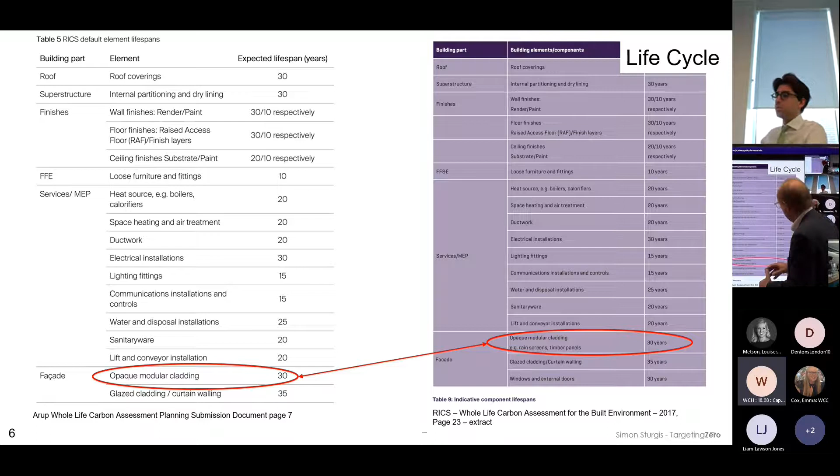Now, if you look on the left here, this is from the Arups Whole Life Carbon Assessment Planning Submission document. This shows a list of all the bits and pieces in the building - structure, services, cladding, and so on. Nothing in that list is more than 35 years life expectancy. Now, what Mr. Pilbrow said is that the issue for him is that the RICS professional statement, shown on the right here, sets out those timeframes, and therefore he's going with them. And that is correct.

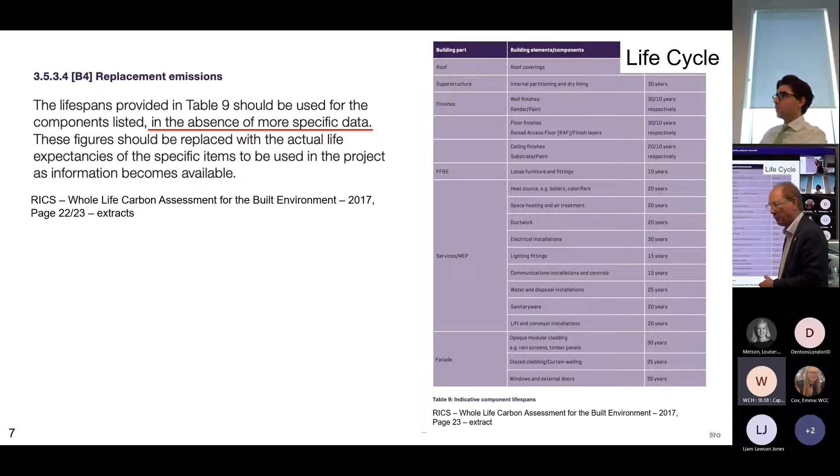But if you look at the RICS professional statement, and Mr. Pilbrow will know this, obviously, because he's been involved with that - it says the lifespans provided in Table 9 should be used for the components listed in the absence of more specific data. These figures should be replaced with the actual life expectancies of the specific items to be used in the project as information becomes available. So in other words, you're not bound by this. If it was thought necessary to challenge the timeframes put by Arups, the Pilbrow team could have done so, but they chose not to. So I can only assume they must have agreed with them.

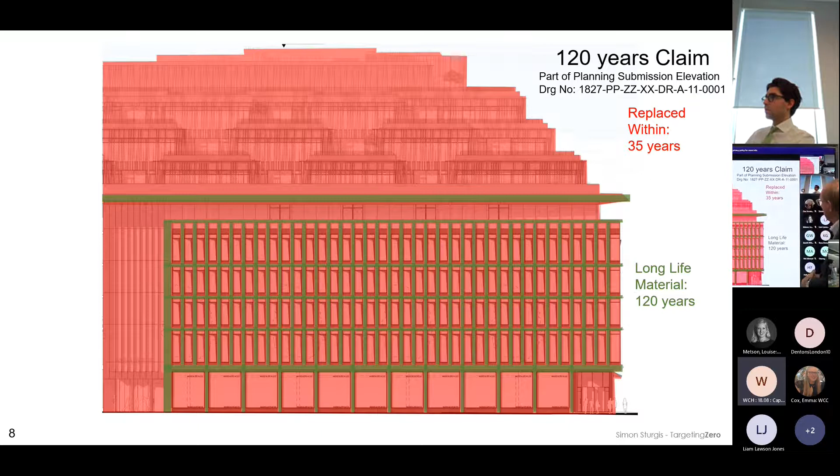So what that means in terms of durability, there's not a great deal of difference between this building and this building, being Neale House, because this building is now 42 years old. And yes, it needs the same sort of level of replacement - it needs plant replacing, it needs certainly the windows probably need to be replaced. This cladding, I'm not quite sure what it's made of, but if it's made of something like bronze, which is possible, then you could replace it, but if you could keep it, I would guess. But certainly the probability is you replace all of that, which is exactly the same thing that happened to this. So what I'm saying is there's an equivalence - say 42 years, which is the age of this building, after this has been completed, you'd be in exactly the same position. So they're very similar propositions.

Now, a lot has been made of this particular diagram, which I want to take you through - the options. And as I said, quoting Mr. Pilbrow, the decision to demolish was taken in 2018. So if we look at these, what I've got here for you on the left is the facade retention section, which I'll come back to in a minute. But what you're looking at here is the 16 options that Mr. Pilbrow's referred to. The first row of these all represent new build options, so those are not really what I'm talking about. Then you look at this row here, and again, all of these include significant new build elements to them. And indeed, if you look at this one here, there's no additional flooring on either floors.

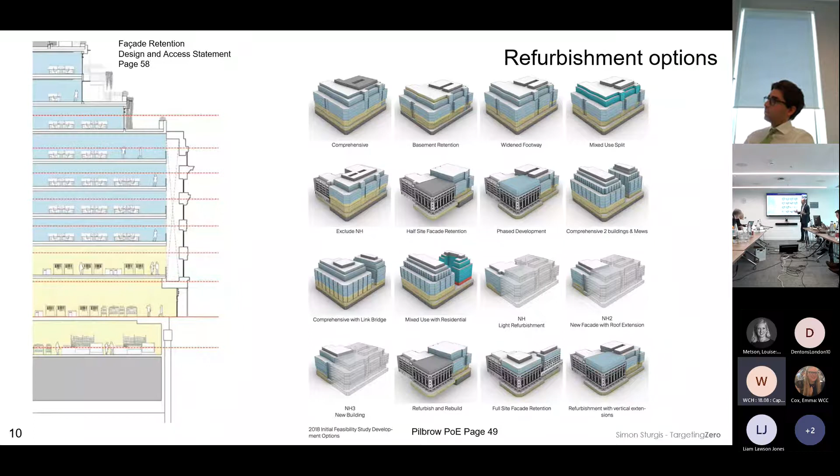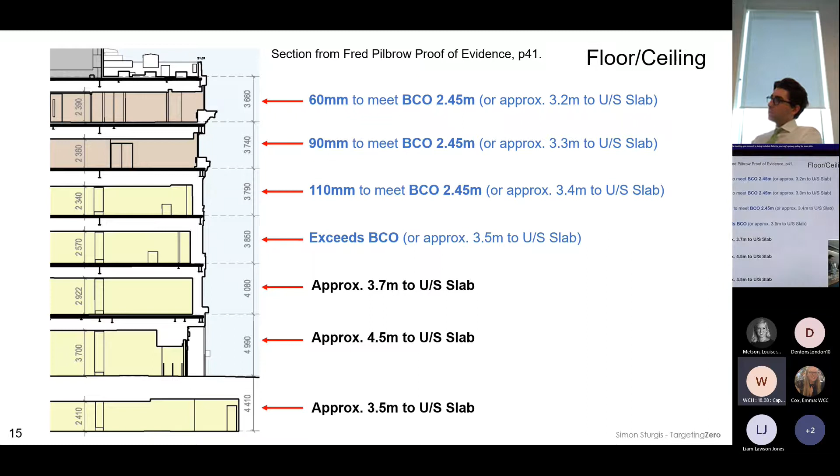There is significantly more height available that is being used, and that's because we've got air conditioning units and presumably ductwork and so on. So walking around, you get a misleading impression because, as has been pointed out, there's all sorts of stuff in there which needs to come out.

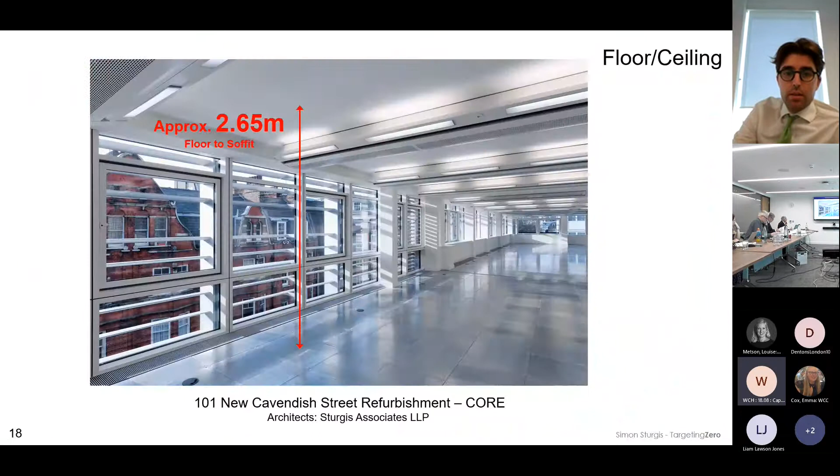As it happens, that previous slide, which was done in 2009 - this building has just been refurbished, and this is the interior.

Now what they've done here, and if you compare this again, you've got 2.65 floor to soffit. They've exposed the columns, and you can see the columns are quite dense, actually dense over there. Also, this building has a fairly limited amount of light. It has deep floor space, and of course there's the low ceiling. You can see here the air conditioning system, the cooling system, has been put in, which would distribute out depending on the layout. And then you've got light fittings hanging down in there.

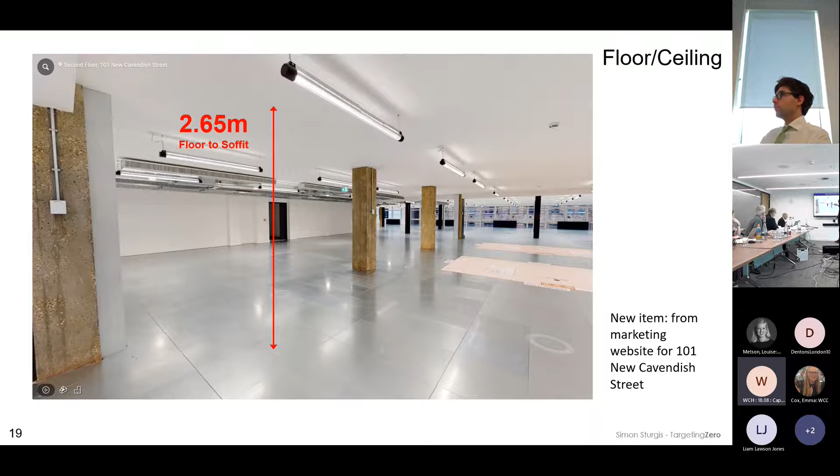So with all this stuff here, you're down to a much lower height. You've got about 2.65, and underneath things like beams and services, you're about 2.2 to 2.3. So that's all quite low compared to Orchard House.

Now what is interesting is that this space is on the market right now for £72.50 Cat A, which is without partitioning and so on, just fitted out with basic services and flooring. But if you want to fit it out, it's £79.50. So that's not a bad rent. And I'm thinking, well, the agent is Knight Frank.

Now this building is in a worse location than being on Oxford Street. It's got lower floor to ceiling heights than Orchard House. And the columns you can see here are quite dense. So in a way, I would suggest this is a less attractive proposition in a number of ways compared to Orchard House. Yet the agent, Knight Frank, who is also the same agent advising Marks and Spencer, says that the buildings refurbished on the Marks and Spencer site are unviable and not capable of refurbishment.

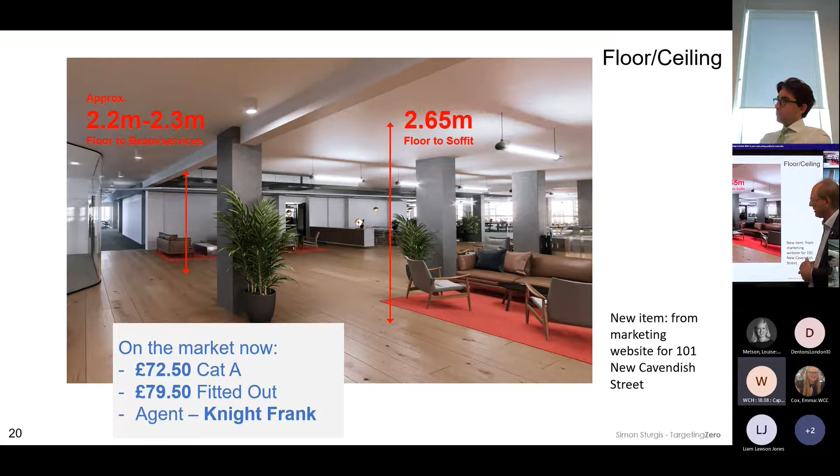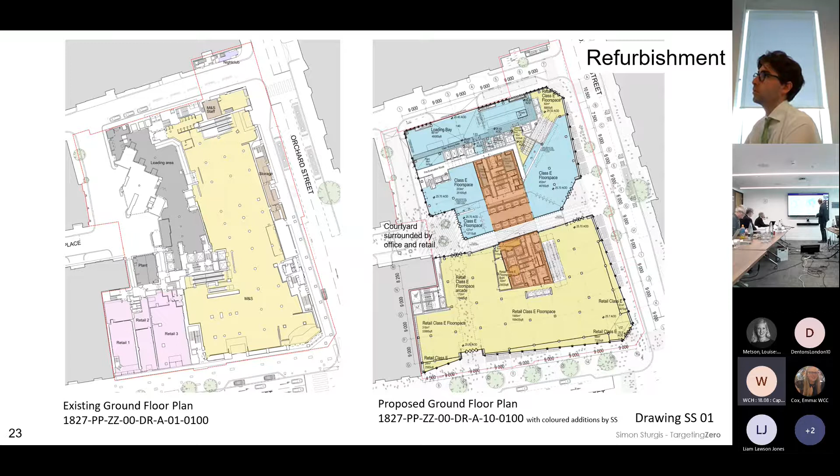Now, what I've done here is I've overlaid, as part of my rebuttal evidence, the diagram of how I would perceive this could be reimagined. The loading bay would go in exactly the same place and be the same size as the loading bay on the proposed scheme, so all those problems around loading and unloading would be resolved in exactly the same way.

Then you've got the office entrance, which I'm suggesting goes in here. And the core, I don't see why we couldn't follow basically the same sort of pattern here, which will have benefits in terms of escape and so on, and of course access on the ground floor.

Now, what I'm also showing here is that clearly, and it's been pointed out, there are issues about the presentation of the office building. Obviously this has a recessed facade and so on, and a front door there. But there's no reason why this facade in this section here...

The facade in this area, at the joint between Orchard House and the Orchard Street extension, that section of the facade couldn't be remodeled in quite a significant way, or have an addition added onto it, or with canopies, or a combination.

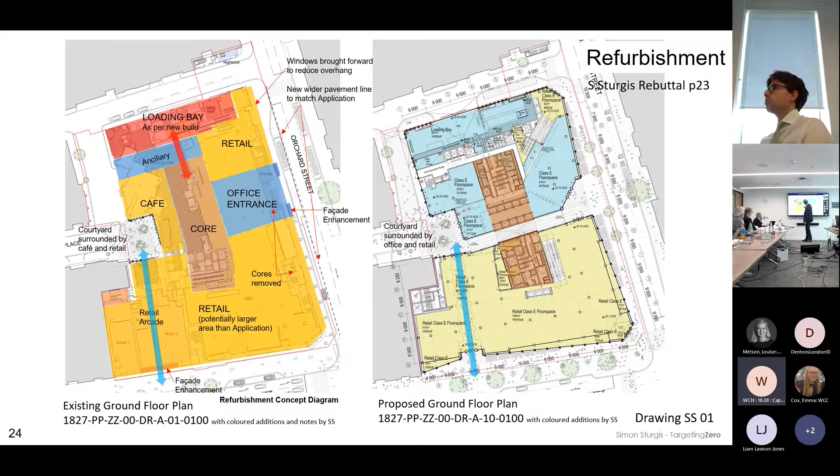And you would have a cafe here. I've basically stolen Mr. Pilbrow's courtyard and put it on there, but I've got a cafe coming around this side and retail here, whereas this has got retail here and an office around there. So I think it's not an unreasonable comparison - in terms of public realm, you've got a huge amount more retail all the way around here. Now, if we go to the next slide please.

So now, this back lump, which I think everybody would agree is a pretty hideous thing, but it is capable of being fixed. This diagram here is from the Arup report, and it was actually included in Mr. Pilbrow's proof of evidence. So Arup identified the limitations on extensions of existing buildings imposed by their structure.

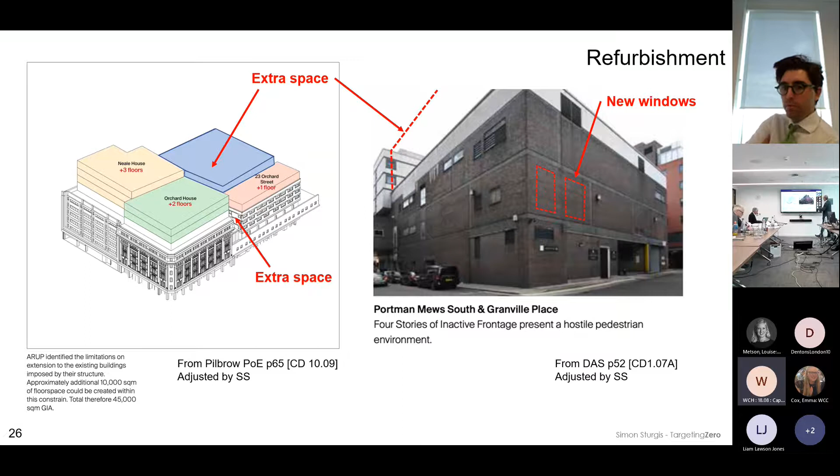Next slide, please. Now, this is a new piece of evidence. This is a scheme that we did with my architectural hat on some years ago. What I'm trying to illustrate here is how to sort out the service yard, because as Mr. Pilbrow and indeed Mr. Gollard said, it wasn't going to work the way I suggested. The reason is because the assumption was that we put a transfer structure at first floor level.

And to do that, you drop the level within there, and therefore you wouldn't get lorries in. Now, this building here was a scheme of that many stories, with a tiny bit of extra stuff on top. To put 2 extra floors on was not possible in a traditional sense, because this structure was not capable of taking it. So what we did, and the plan of this original building was a C-shaped plan, is put a brand new core in, and that core effectively hung those 2 extra floors. This was not strange, complicated engineering, this was all pretty straightforward. But what it meant was we could get 2 extra floors onto a building that could not take extra stuff in a conventional sense.

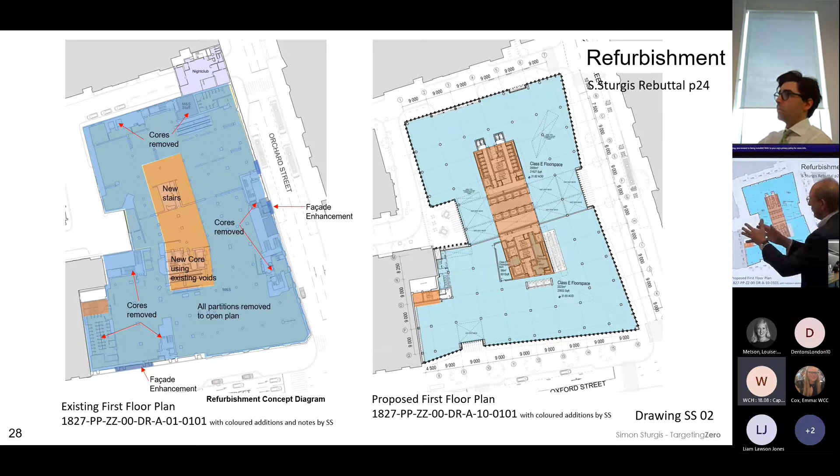So what you're trying to do is replicate this kind of an arrangement. Now, obviously, I haven't worked this out in laborious detail, but what I'm saying is that it is not impossible at this point in time to imagine that you can get something like this to work, which is not unlike this. Next slide.

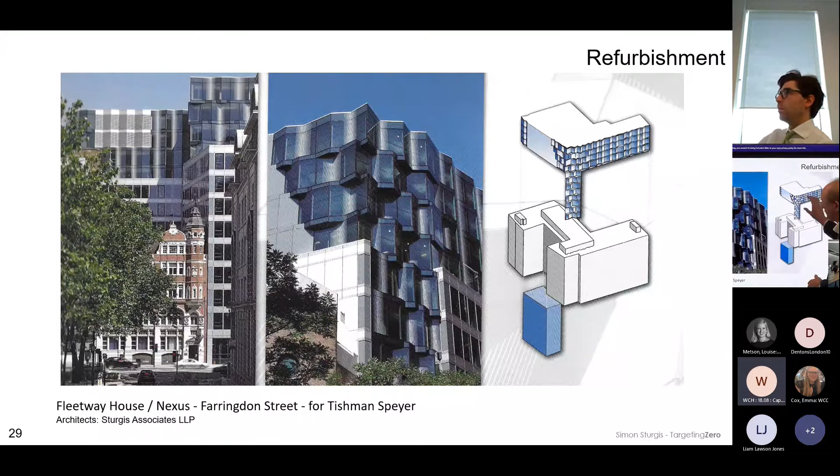So the way this worked was, here's the existing building, which had concrete cladding and screed, concrete screed, and had a main lift core here with a light well behind it, and these 2 things are staircases. So what we did is we took off all that heavy cladding, concrete cladding. We took off all the screed on the floors. We took out these 2 cores. We kept that core.

By reducing the weight, by taking all that stuff off, we were able to add 4 new office floors. We were also able to extend the floor plates out and put in new cores and fill in with extra space, so we were able to completely reimagine that building.

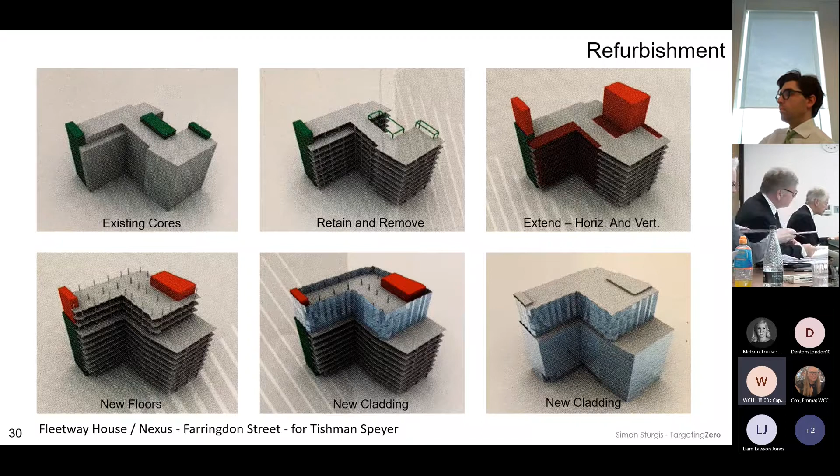That kind of thing is exactly what I would expect to be able to do here. It's not peculiar. It was entirely economically viable for the then client Tishman Speyer, and it worked.

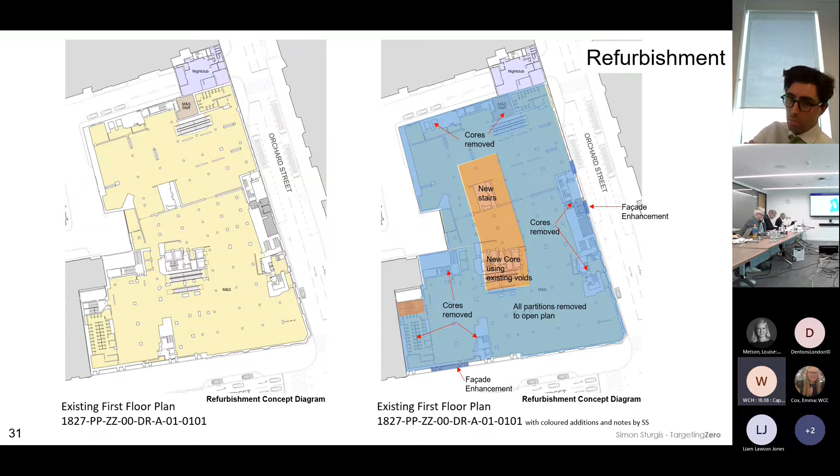On the upper floors, what I'm suggesting, and I don't know the extent of this, is that there may well be some additional new space to be put in above the existing height of this roof level that we walked on the other day.

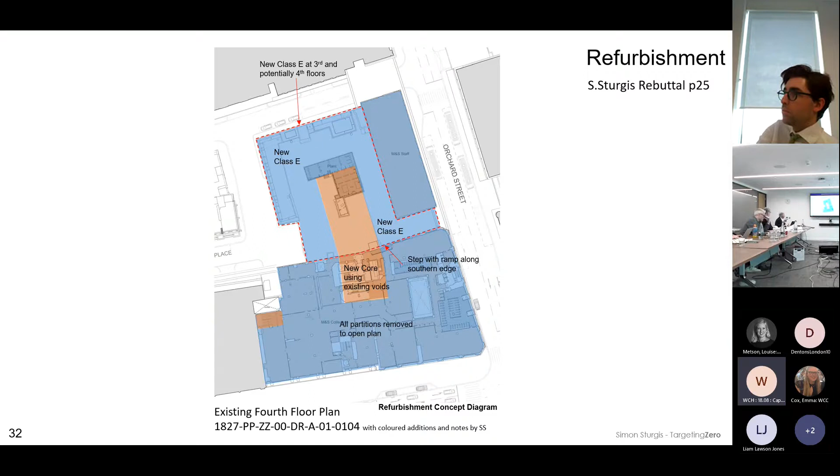It's no wonder that all the advisors and indeed the planners are against the idea of the refurbishment option put forward by the M&S team, because the light touch refurbishment manifestly does not work. As I've said in my previous evidence, I believe it was a straw man. It was put up to fail.

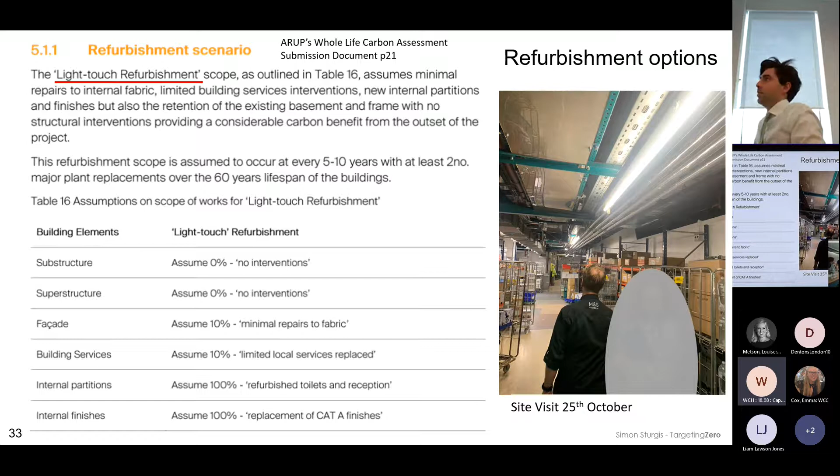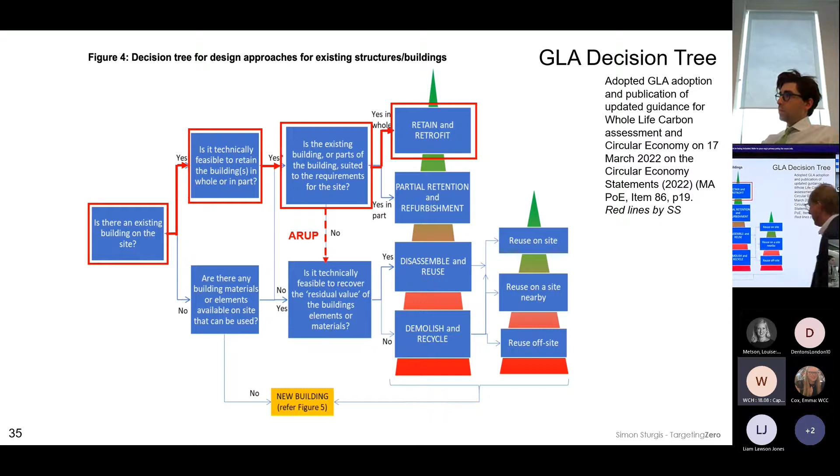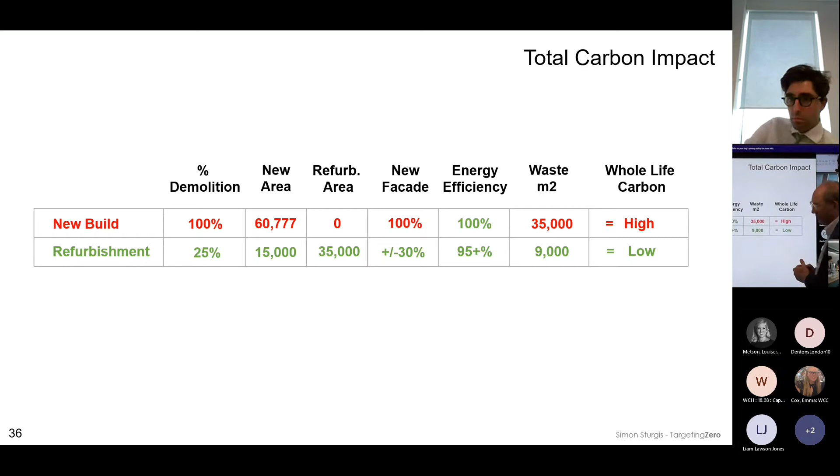Next slide, please. Before I come to my last slide, I want to make a couple of key points. One is that a sustainable building—and if we assume that Mr. Pilbrow's scheme is a sustainable building—is not the same as a sustainable site strategy. Indeed, putting his building on an empty site is a very different proposition to putting his building on a site that has...

...usable and viable buildings. I think there's a great opportunity here to make an exciting, creative and viable scheme of these buildings, one that I think Marks & Spencer could use as part of their Plan A brand, to show how good they are at responding to national policy—net zero policy, achieving net zero by 2050 and all those other benchmarks. They could demonstrate that they were in tune with all that.

And I would also say that the sort of scheme I've shown you, even though people looked at the plans, the level of information I've given you today, sir, is not being provided to any of the other consultants or indeed the local authorities. So it's no wonder that they've rejected refurbishment, because they've been referred to a light touch refurbishment, which I think evidently doesn't work.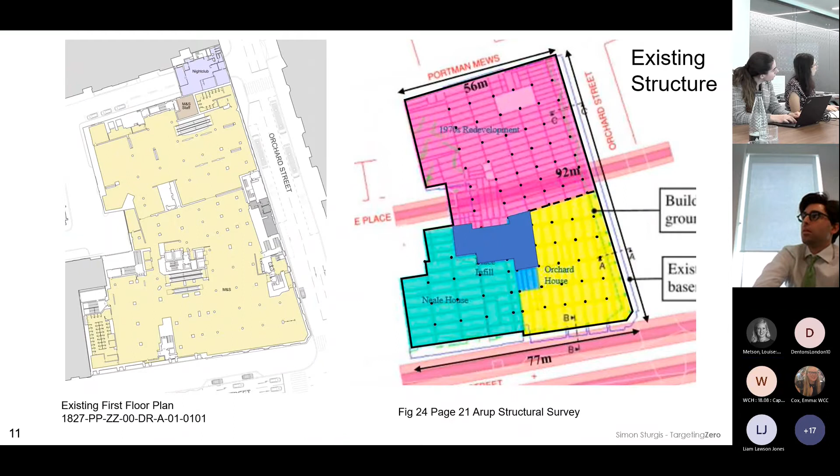Existing, yeah, no, no, existing. Correct, new. No, that's existing. That's existing. Structural survey, oh no, yeah, it's the next one. That's new, yeah, that's new. Next, new. That's existing. Well, that's not information. That's not new, it's not that new.

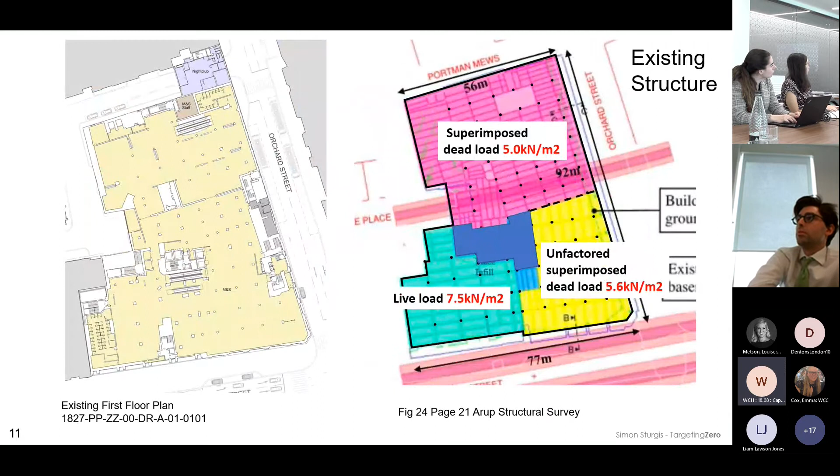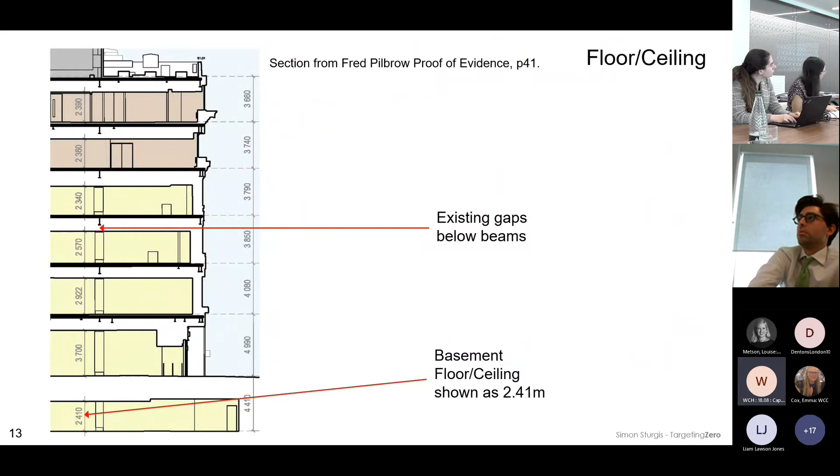Was raised with Mr. Pilbrow in evidence in chief. It's existing, that's all existing. Next, existing. Existing, but I've made a comment about the gaps. Yeah, but that's not new. Go back, sorry, next one.

New. That's, no, that's in my rebuttal. You said at the time it was no evidence. So, sorry, I think it might be new, yes. But you don't need to, just a feel for which ones my team should look at.

Just to clarify on this point though, that the BCO, the comparison of floor heights to the BCO guide is in your rebuttal. Yes, but that specific page - right - is not in your appendices to the rebuttal. Right, so just to clarify, there's some new elements, yeah. Next.

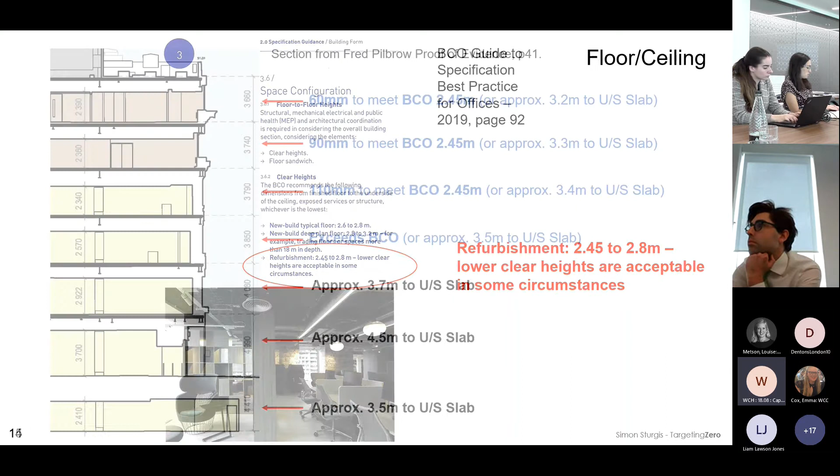This is original information, this is my deductions. I don't know if you call that new or existing. Those are site visits, so those are technically new. Thank you.

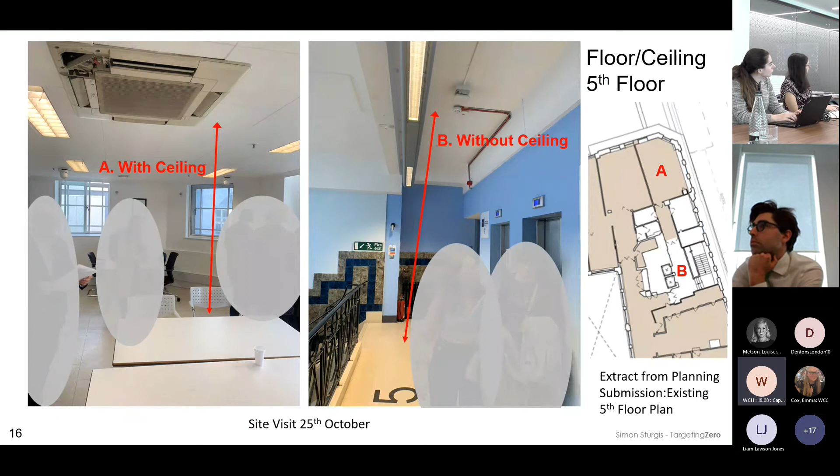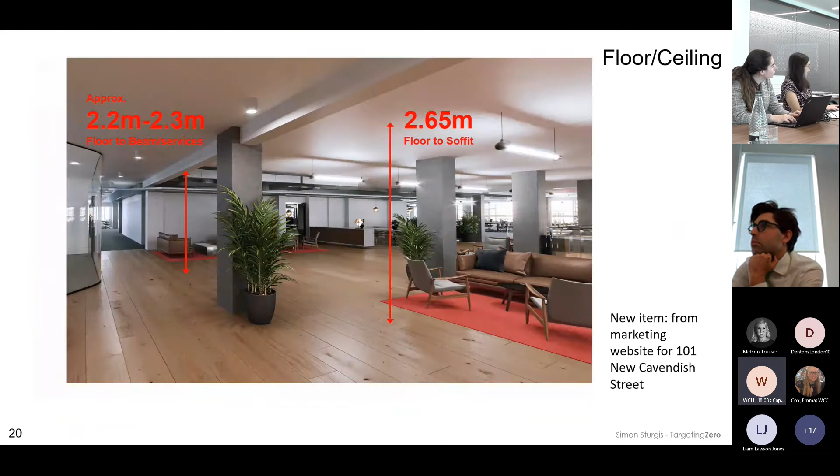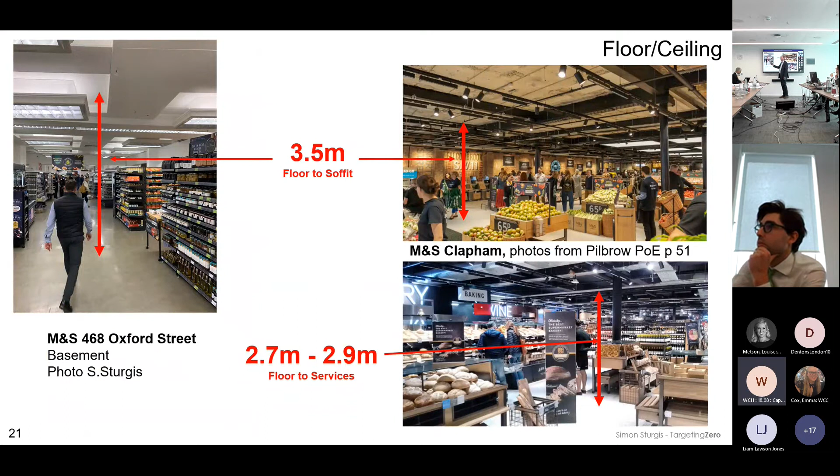That's new, that's entirely new. That's new. That's new. New. This is existing. Yep, that's new. It says the photograph's new, but the content is exactly as per the section.

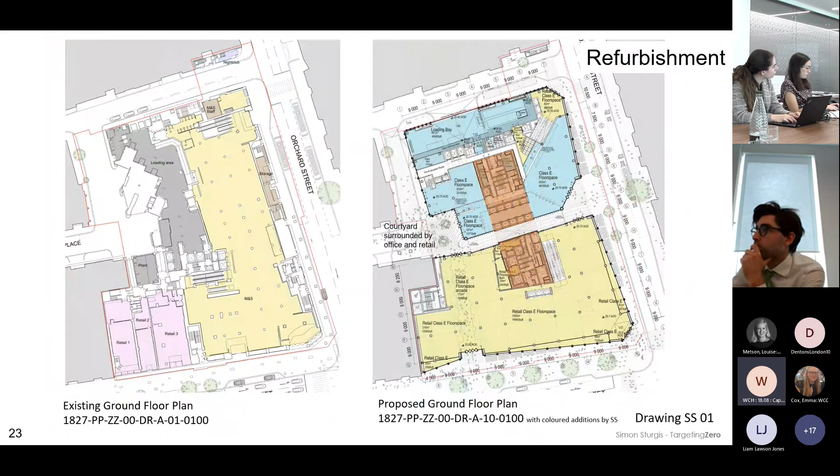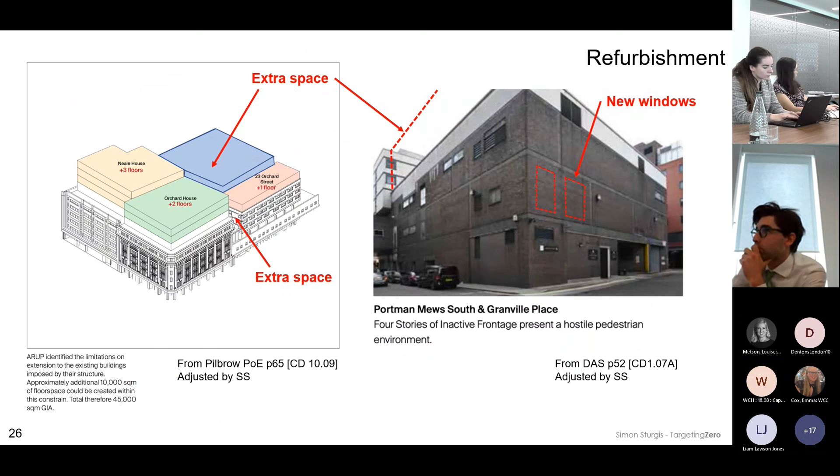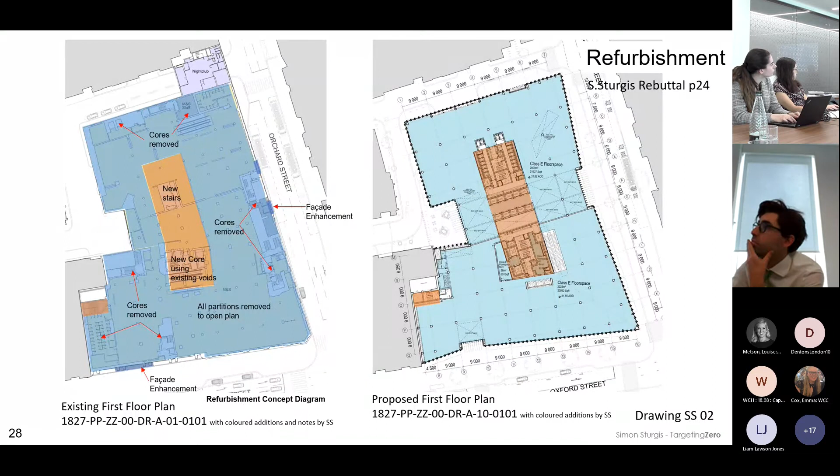Those are new. Again, that's, okay. Those are existing. Existing. That's new, yeah. That's existing, photograph existing, I made some additions on it, so that's new. That's existing, that's new, that's new.

Oh, that's new. Can you just go back to what the inspector was looking at? Yeah, no, I've got 30. You got, yeah, great, cool.

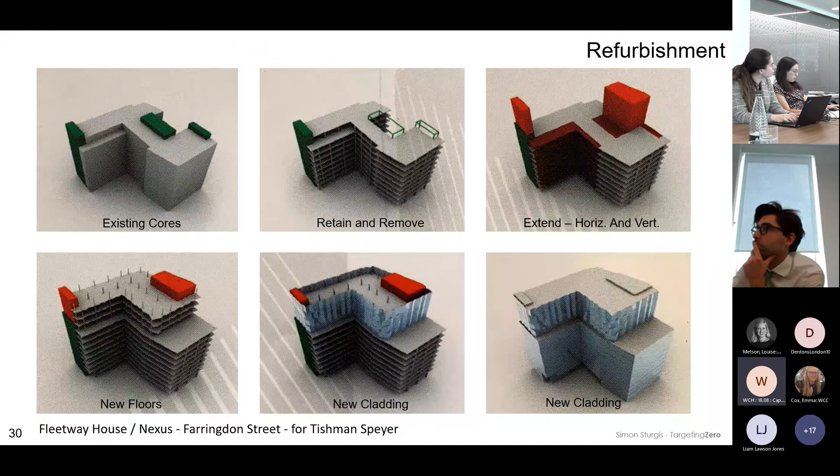That's existing. Yes, that's existing. Existing, that's a photograph from the site visit. Existing, and this is basically Arup information put onto that, but that's new, but it's a new diagram. Yeah, it's a new suggestion, way beyond what was put to Mr.

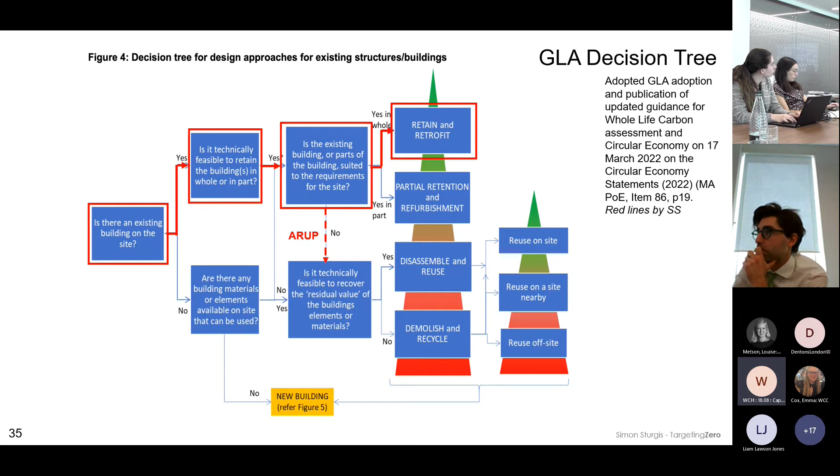Okay, we don't need to have the numbers. We don't need to have a debate now, no, but. 35 is. Yeah, that's fine. That's an existing, this is new. 36 is new, all of that information is new.

All right, that's so obviously new. Just to identify the scope of the task for us, or the weight which you can give to evidence that can't be cross-examined, I think it might be useful if we also counted the extra pages that we had to look at on Mr. Pilbrow's evidence.

Okay, very happy with that. Full, well, certainly more than. Haven't looked at it. Mr. Harris, you say can't be cross-examined. I'm prepared to give you additional time if you want to prepare for cross-examination. If you want to have a think about it, you can have an extended coffee. No, I'm very happy with the break that we've got.

I'll need to discuss with the team how we respond. Yeah, that's what, I don't think it's fair to you to expect me to cross-examine all the evidence that we just heard in its fullness. Absolutely not, but you need to take instructions on how you deal with it. Yes, exactly. Okay, well, what we'll say is that we'll break till 11:30.